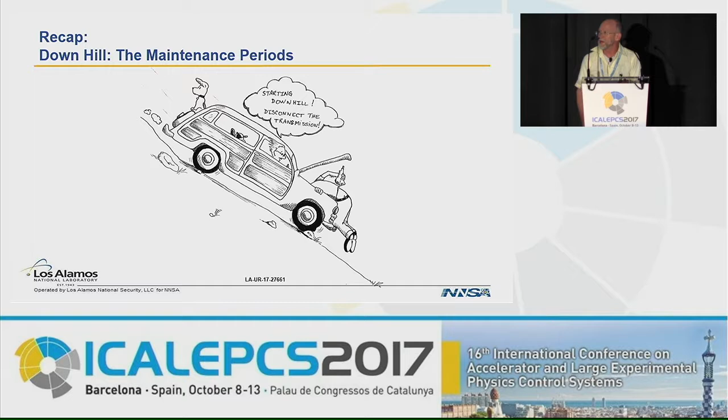To recap, the metaphor of this talk is that negotiating an upgrade schedule is a little bit like driving a car through mountainous terrain with a lot of peaks and valleys. When you start down a valley, you turn the engine off on your car and you replace as much of it as you can. And then you try to put it all back again and make it run before you reach the next uphill section. At the bottom of the valley, there's usually a level place, which is equivalent to the startup, where you just sort of coast while you try to figure out what your modifications may have done to the machine.

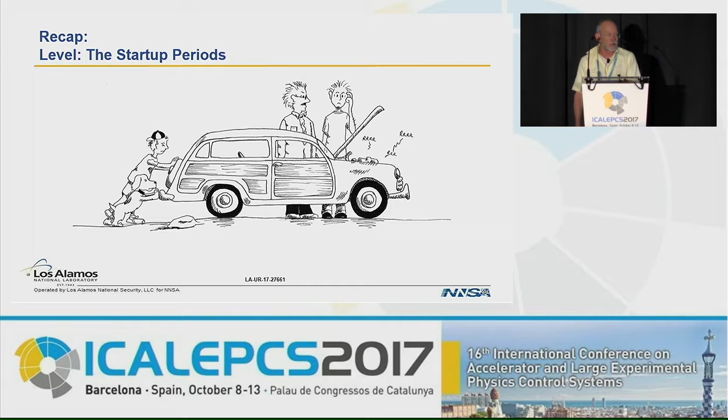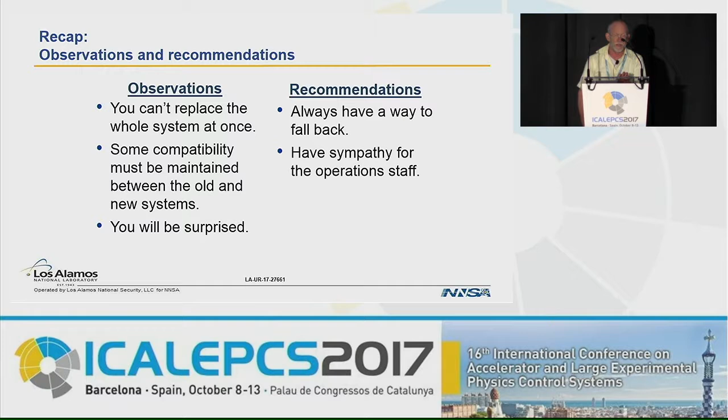So, last time, the observations we made were, 1, you can't replace the whole system at once. 2, because you can't, some compatibility must be maintained between the old and new systems. And 3, you will be surprised. The recommendations were 1, always have a way to fall back, and 2, have sympathy for your operations staff. Now, in this talk, we will be making some amplifications on those observations and actually adding one more recommendation for your pleasure.

So here's how RICE works. First of all, it's been there longer than I have. It was designed and built in the late 60s and originally provided all of the control and data acquisition for the accelerator. A typical RICE station provides binary and analog control with 12-bit resolution and has 3 primary functions. There is a Beam synchronous data acquisition function, there is a Fast Protect monitoring function, and then there's just your standard industrial I/O function.

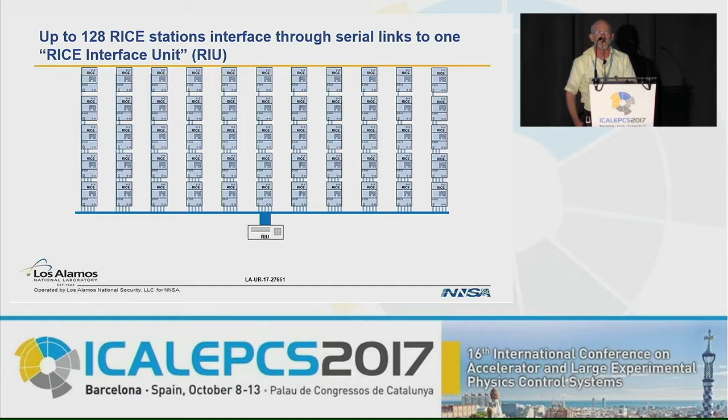You can have up to 128 RICE stations which interface through serial links to one RICE interface unit, or RIU. One RIU read operation then will return up to 128 data words, one from each station, and they will all have been read at more or less the same time, plus or minus a few random cable delays. So this is how the RICE system handles beam synchronous and fast machine protection data acquisition.

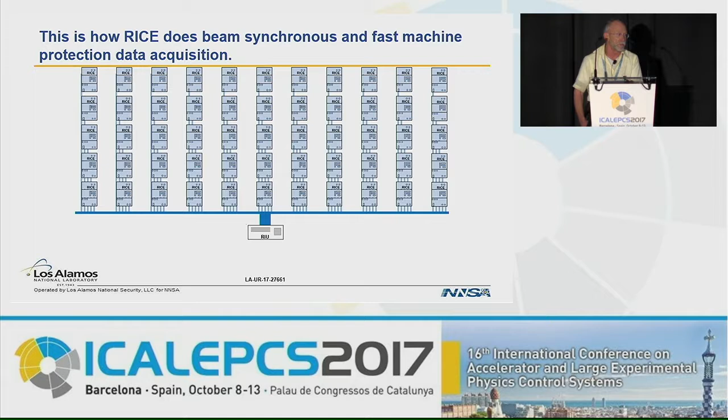The RIU then interfaces to a MicroVAX, another old piece of equipment, and the MicroVAX then serves that data to the network, and it can be had by all of the EPICS nodes that we want. The system worked well for a while, but as time progressed, it also became one of our biggest bottlenecks, especially during tune-up sessions in which we were using a lot of beam synchronous information.

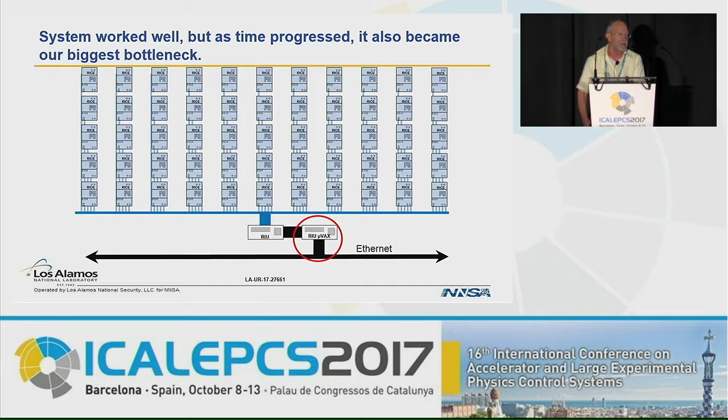So this leads us, again, to recap our first observation. You can't replace the whole system at once. So we divided that into 3 subtasks. Industrial I/O, where we would use National Instruments CompactRIO crates running EPICS. Fast protect reporting, which was going to be replaced by CompactPCI crates with timing modules and binary input cards. And the beam synchronous I/O, which is going to be replaced with VPX crates, timing modules, and waveform inputs.

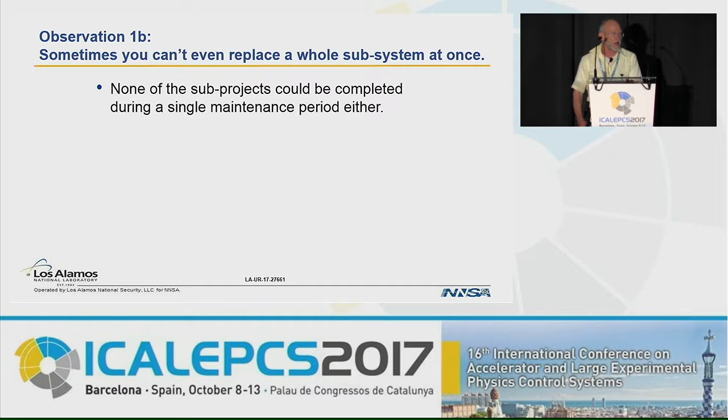But none of these sub-projects could be completed at once either. So that leads us to observation number 2, which is some compatibility needs to be maintained between the old and the new systems. Until we can get each entire subsystem converted, the control system will have to deal with data from both sources. Now, this is not a problem for industrial I/O because the data of both sources are pretty much independent of each other.

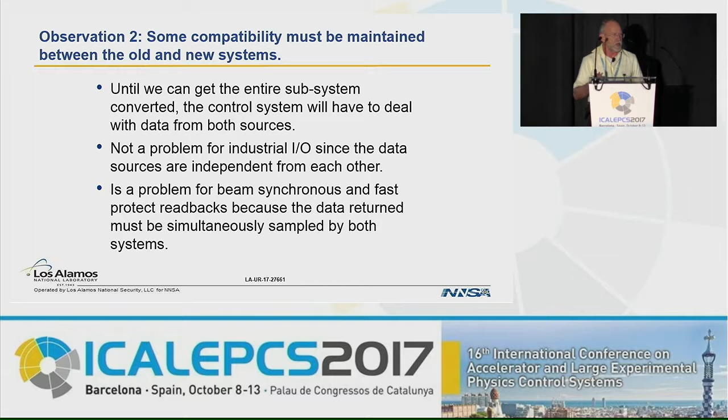But it is a problem for beam synchronous and fast protect readbacks because they must return data that was simultaneously sampled by both systems. Now, like many other facilities, we use a correlator program to combine the data from both the old and the new systems. The data is correlated by timestamp, and in order to make life easier for the correlator, we only timestamp the beam pulse. Everything that happens in that pulse has the same timestamp, and therefore correlation can be achieved by exact match.

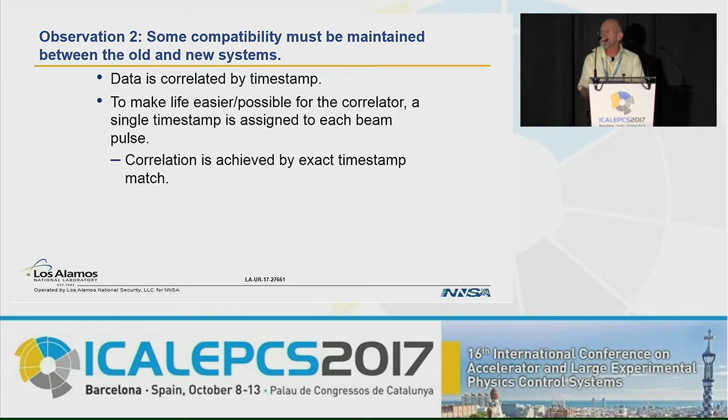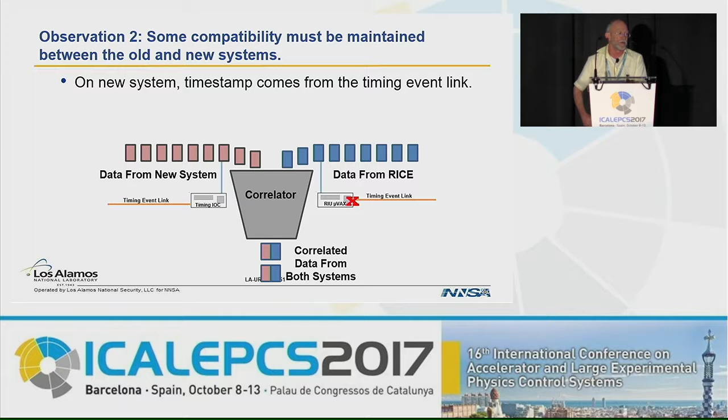So the way the timestamp gets to the data on the new system, the timestamp comes from the timing event link, and is basically just timestamped on the basic IOC EPICS records. However, Micro Research Finland has not yet provided us with an event receiver that interfaces to a MicroVAX Q-bus. So we can't use the event system to timestamp the RICE data.

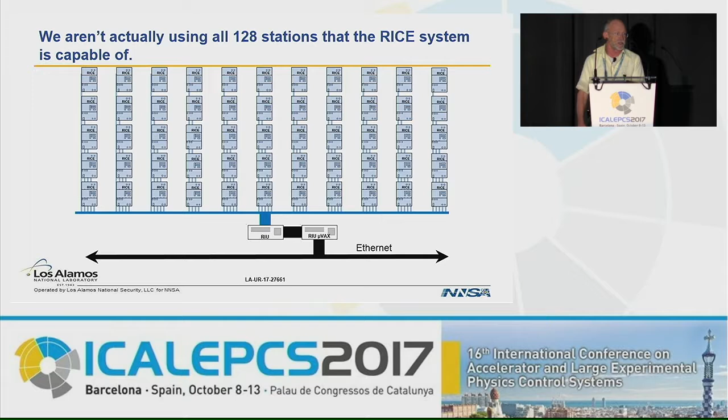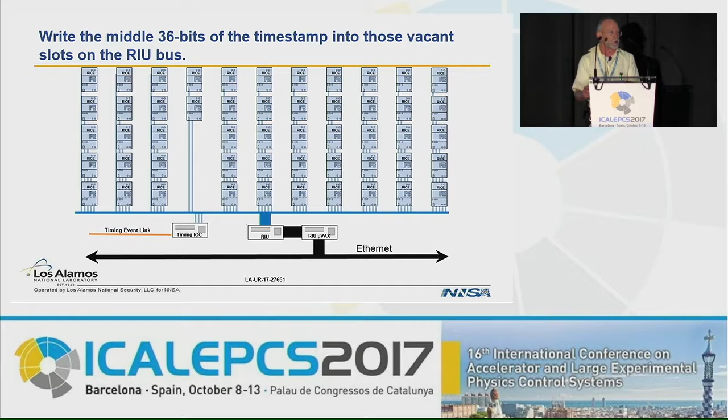So here's what we do. First of all, we aren't actually using all 128 of those stations that the system is capable of. So you find 3 that aren't being used. You put in an IOC with an event link and 3 12-bit digital outputs. We connect the digital outputs to that bus, and now the RICE data set itself contains within 3 words enough of that timestamp to deduce an exact match.

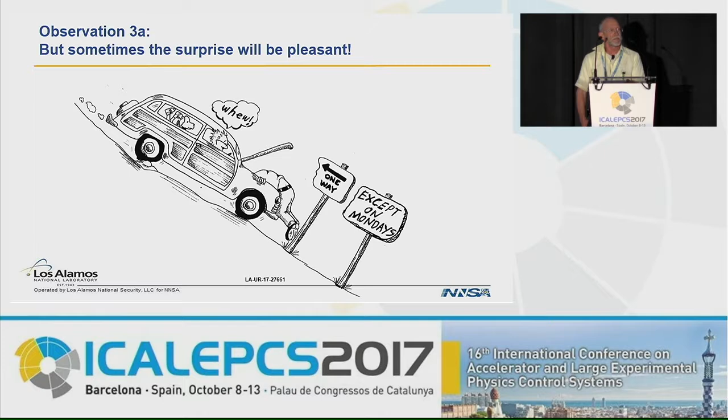So now we come to observation number 3. You will be surprised. But sometimes the surprise is pleasant. So here's our pleasant surprise. In 2015, we replaced the industrial I/O functions in 4 RICE stations. In 2016, we replaced the industrial I/O function in 7 RICE stations. A bit of an improvement, but at this rate, we were kind of on track to finish somewhere between 2023 and 2025. So, to our great surprise, in 2017, we replaced 33 RICE stations, approximately half of all the RICE stations that we have operational.

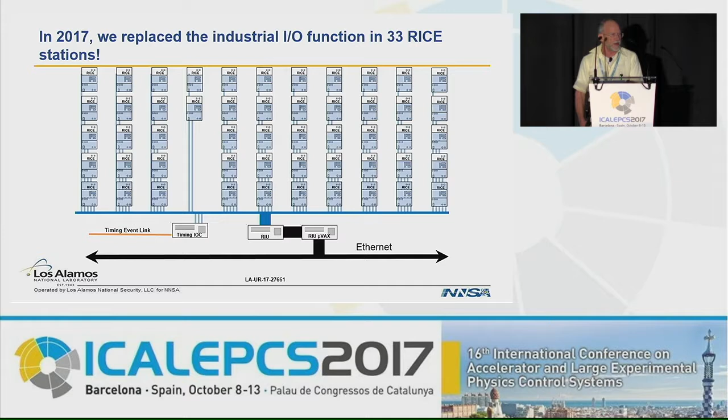So how did we do that? Well, there are 3 things that happened. First, we actually had more people working on the job. That doesn't necessarily guarantee more efficiency, but in this case it did. The 33 that we replaced were all along the LINAC, and they pretty much had the same kind of configuration. So we got a lot from some redundancy there. But the thing that really did the most for this particular miracle was the change of tactics, which leads us to my first recommendation. Do as much as you can before the maintenance period starts.

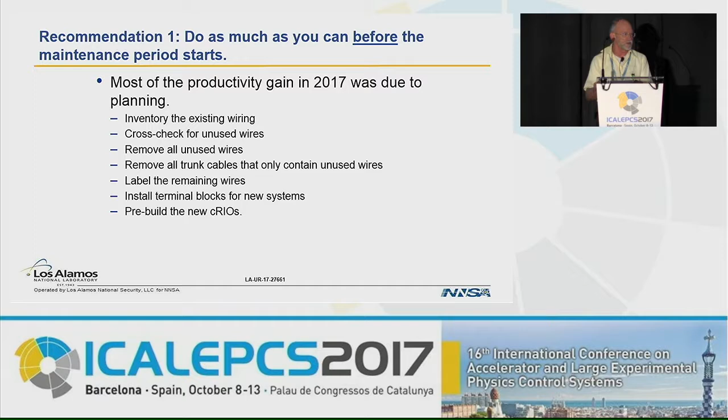Now, most of the productivity gain in 2017 was due to planning. The project lead inventoried all of the existing wires during the operational period, cross-checked them with the device tables to make sure that they were unused, removed all of the unused wires, removed all of the trunk cables that only had unused wires, labeled all the wires so you know where they went, installed the terminal strips, and made sure that the CompactRIOs that were going to replace them had already been built. So the result was that during most of the maintenance period, most of the work just consisted of moving wires from one place to another.

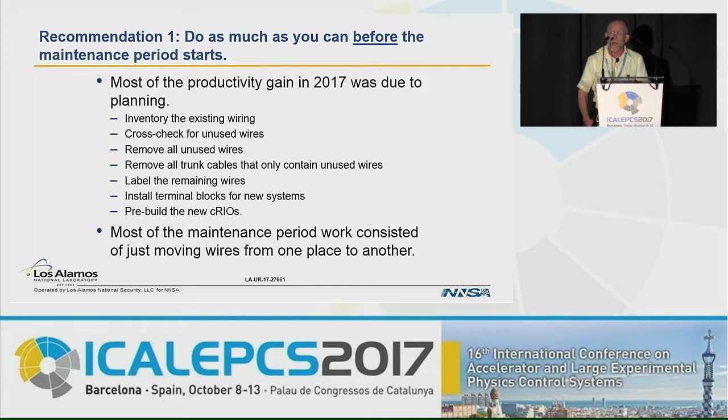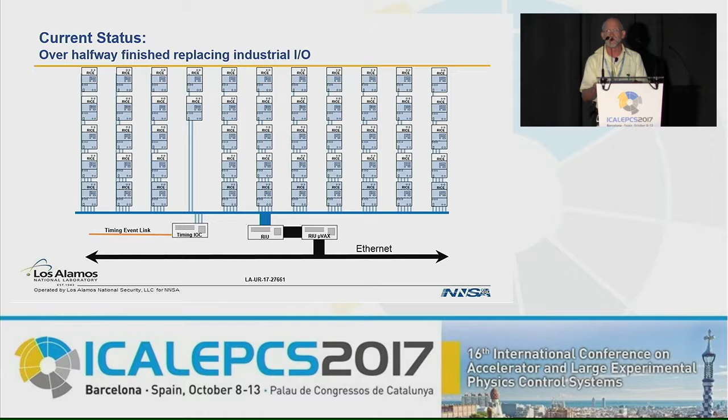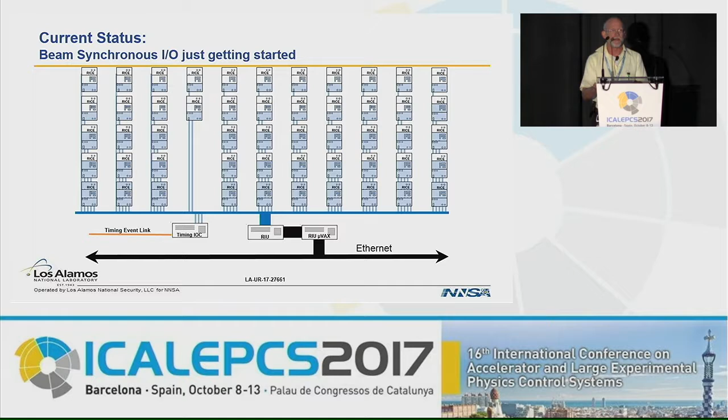So here's the current state of our system. We are over halfway finished with the replacement of the industrial I/O. We are over half of the way finished with the replacement of the Fast Protect readback. Our beam synchronous data is just getting started, but we are waiting eagerly for that.

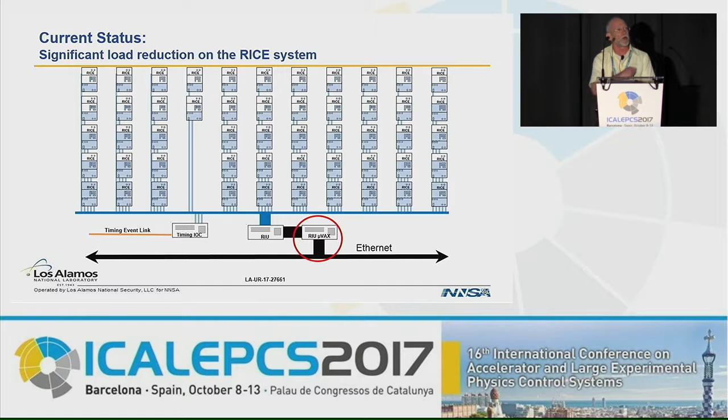And over this last shutdown, we replaced over 4,500 channels, which is a very significant load reduction on the RICE system. So I can now stand here and report to you that that pesky bottleneck that has been bothering us for years and years and years got worse. Sometimes the surprise will not be pleasant.

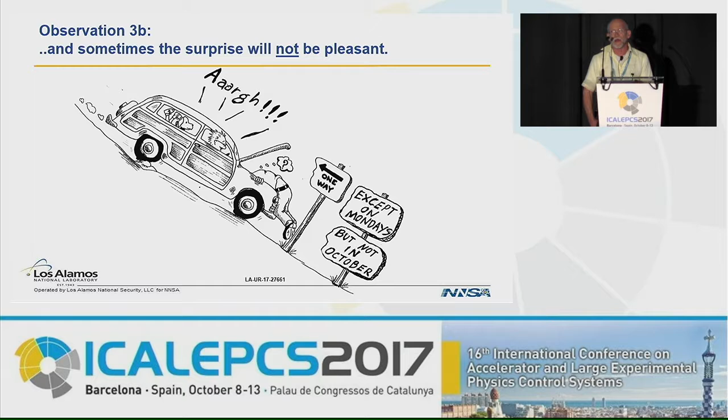So what happened? Well, the only honest answer I can give you is, we don't know yet. We have the light bulb, but it hasn't gone off yet. We have our theories, one of the best of which is that beamline physicists, giddy at the prospect of having a more responsive RICE, have been piling more and more requests for beam synchronous data onto the system and loading it down even more than what we unloaded it. But we don't really have any data yet to prove that. We're still investigating it. So the best answer I can give you right now is to be continued.